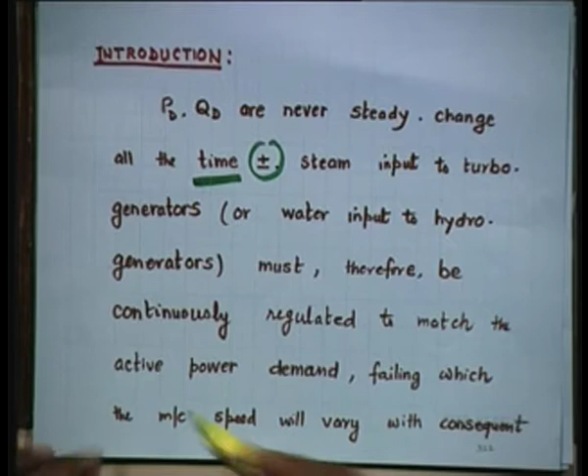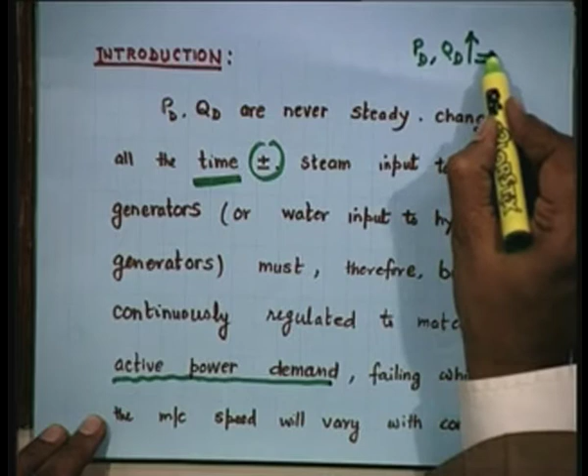Steam input to turbo generators or water input to hydro generators must therefore be continuously regulated to match the active power demand. Since PD and QD keep on varying, correspondingly your steam input or water input should also keep on varying, up and down.

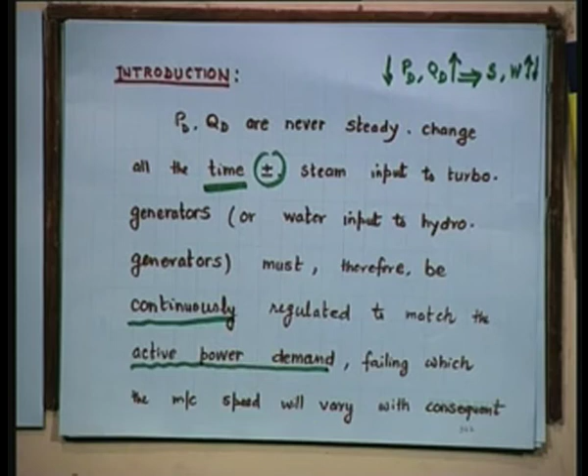So there is a constant matching going on between them to keep track of each other, continuously, constantly. Failing which, suppose you do not do it, suppose you say I do not care, then what will happen? Then the machine speed will vary.

Once the frequency varies, the speed will vary. Once the speed varies, the performance will vary, because motors are supposed to operate in many applications at constant speed. For example, take a flour mill. If that motor speed changes, the atta will have a different variety within just 5 minutes, if the speed keeps on changing.

Or even take a paper machine, a paper factory, the Times of India, each page will be of different width. How do you like it? Each page of each book, if it is of different width, different length, different thickness, the book will look awful. So speed has to be constant, but if frequency is varying, naturally speed is linked with frequency, since F equals Pn by 120. So with P, the number of poles, being constant, and 120 being constant, there is a direct relationship between frequency and speed. If there is a delta F, a corresponding delta N is bound to be there, whether we like it or not.

A change in frequency may be highly undesirable. Think of the clocks, the electric clocks. If frequency changes, the time will also change, and that will play havoc. How can you just keep on changing the time with speed? So it has to be absolutely constant frequency operation; that is all a synchronous machine is about. It operates at constant speed because frequency remains constant.

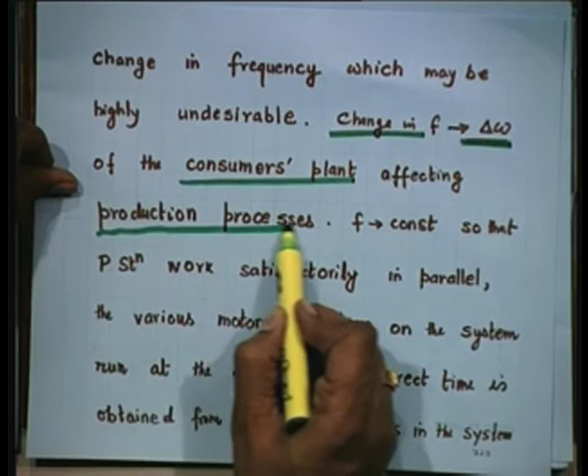If there is a change in frequency, there is a change in speed, again and again I am repeating, of the consumer's plant, affecting production processes. I have already explained how different changes will affect different products, be it paper, be it clocks, be it atta in a flour mill, anything.

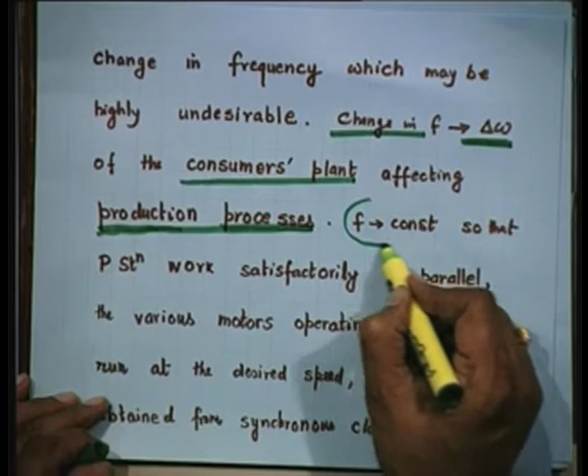So keeping frequency constant is more important than keeping voltage constant, because for voltage we have a voltage stabilizer, a UPS, but a frequency stabilizer is very rarely used. We do have frequency stabilizers, so that the power stations work satisfactorily in parallel, and the various motors operating on the system run at the desired speed, the rated speed for which they are designed. So, designed speed, rated speed, desired speed, required speed, whichever word you want to use, the idea is there is a fixed speed at which a particular motor or device is supposed to work.

Correct time, as I was telling you a few minutes back, is obtained from synchronous clocks in the system. Otherwise there will be no correct time available, and not only that, there will be an error, and this error will be cumulative. As someone says, even a clock which is stopped shows the correct time at least twice a day, twice in 24 hours, but a clock which is running behind never shows the correct time. So even the stopped clock is better than the one not showing the correct time, because that clock will at least show the correct time twice.

You can see even in your hostel, when you get power from a standby generator, it is of different quality. Then you get power from BSES or DESU or DVB, whatever the name is.

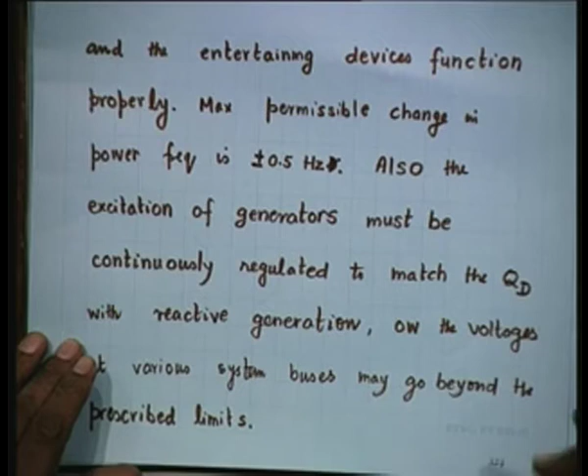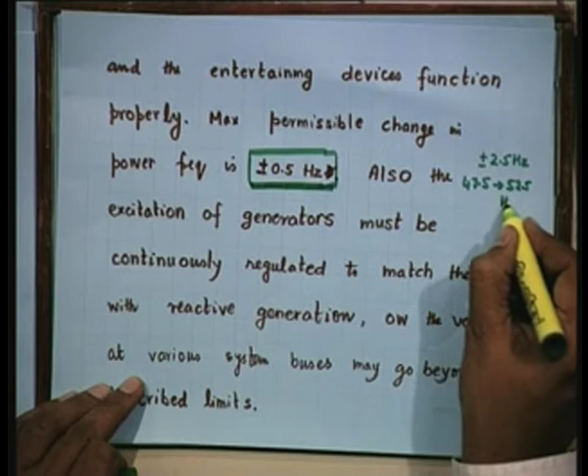The maximum permissible change, I have already talked about it in the beginning of the class, is plus minus 0.5 hertz. But in India, we have a special requirement, plus minus 2.5 hertz. That means it can go from 47.5 to 52.5 hertz.

But in the world standard, it is plus minus 0.5 hertz. If it is crossing beyond 49.5 or 50.5, or in the United States 59.5 and 60.5, immediately AGC will come into play. AGC is automatic generation control.

Unfortunately, we do not have any AGC in this country so far. Also, the excitation of generators must be continuously regulated to match QD. We have been talking about PD so far, real demand, but the reactive demand...

...the reactive generation we have to change. That means we have to change excitation of generators. We want to keep QD constant. Otherwise, the voltages at various system buses may go beyond the prescribed limits.

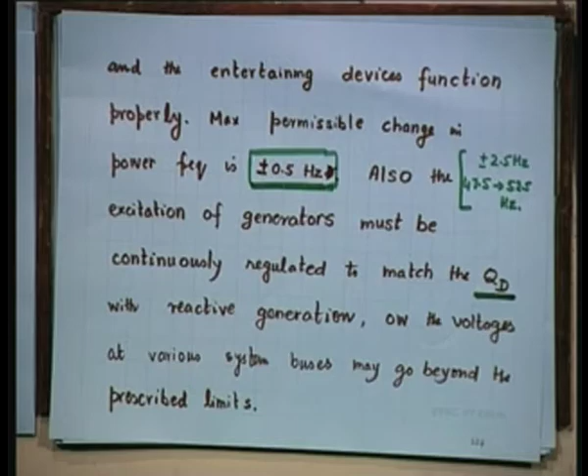This problem we have studied very well in the past, in earlier lectures. If you do not do that, the voltage will go beyond limit, either lower limit or upper limit.

Now, here is a schematic diagram of load frequency and excitation voltage regulators of a turbo generator.

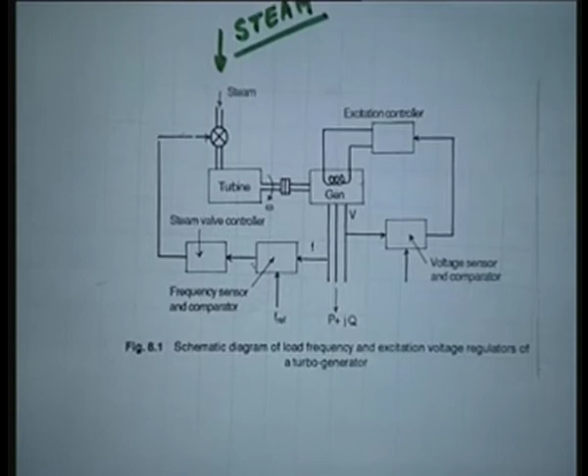From here the steam is coming. How is steam produced? By burning coal, water getting heated up in the boiler, then steam is passing through the turbine.

The fuel can be coal, natural gas, nuclear fuel - it can be uranium, thorium, plutonium, anything, it can be multi-fuel. As I told you, now cars and buses run on multi-fuel. Similarly, here also there can be multiple fuels.

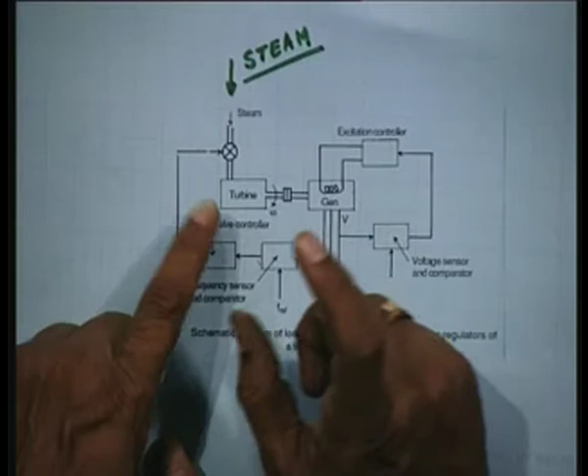Once the steam at proper temperature and proper pressure enters the turbine, which is running at some speed and connected to the generator, power is generated. You take a sample from this power, P plus jQ, which is fed to the grid.

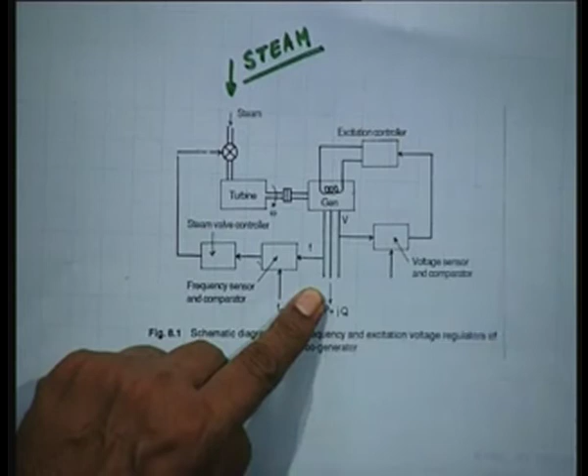All those transformers, circuit breakers, all things are there. It is not shown in the figure, but that you know.

Sample this frequency, compare it with the reference frequency. You must have done control systems in your earlier lectures, so you have to compare whatever frequency comes.

Let us say it is 48 hertz, and the reference frequency is 50 hertz. So there is a frequency sensor and comparator in this block.

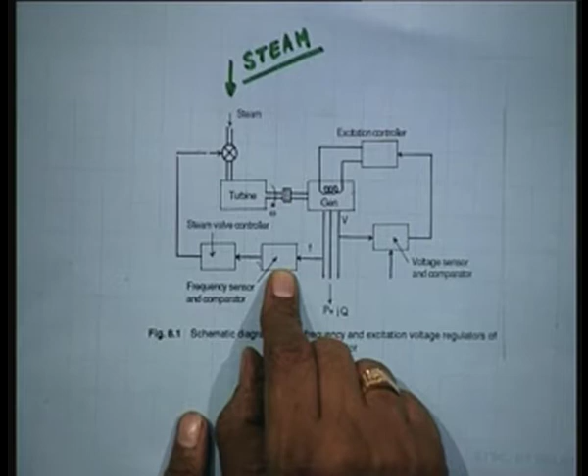It will then control the steam valve controller, because if frequency is low, you have to increase the steam input. If frequency is high, you have to decrease the steam input, and likewise with hydro, you have to open or close the gate accordingly depending on the frequency.

If frequency is below 50 hertz, gate opening will go up, unless it is already full, then you can't do anything. But if there is scope for control, we will put it up. If frequency is higher, which also happens, we have to put the water down.

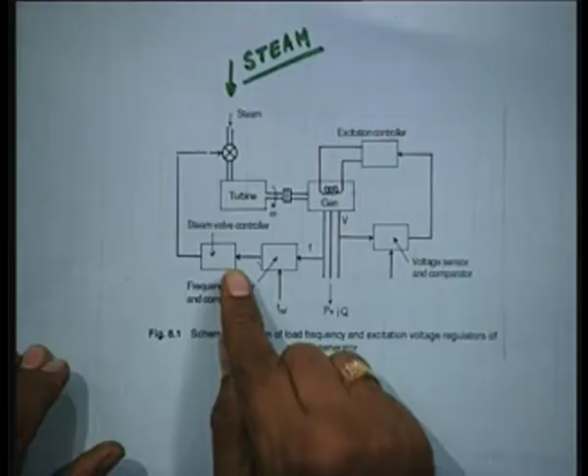This is a steam valve controller, and then the signal goes here. This is called a comparator in control system language.

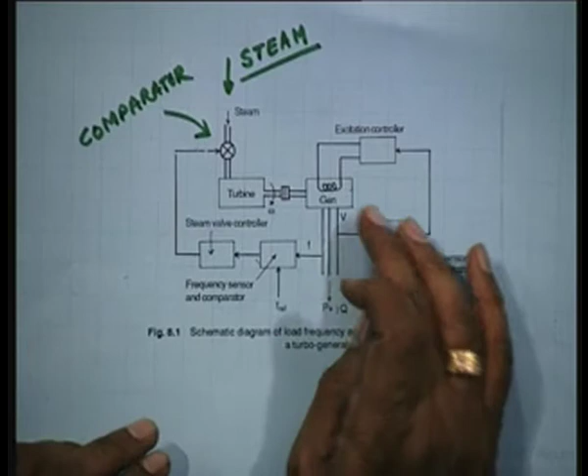And then we control the steam through a controller, and the turbine will operate in such a way that you generate power of correct frequency. Till that time, this feedback goes on.

Simultaneously, there is a voltage control loop - you can't separate them. P and Q, this is choli-daman ka saath, you know, they are always together. You may analyze them separately, control them separately, use them separately, but they are together whether you like it or not.

Similarly, you take a voltage sample, and there is a voltage sensor and comparator. This is again compared with a V reference.

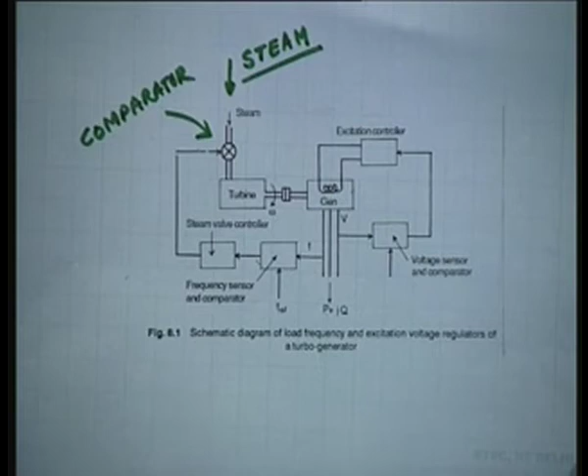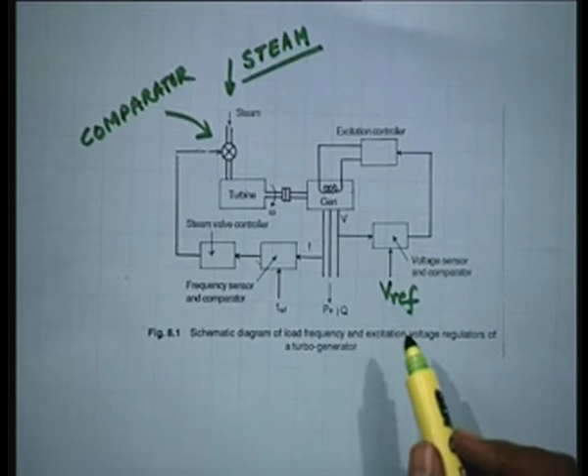This is the F reference, this is the V reference, and if there is a mismatch more than a certain epsilon - what is epsilon here? Plus minus 5%. What was epsilon there? Plus minus 0.5 hertz. So this is epsilon frequency, this is epsilon voltage.

The allowable permissible variation. Then again a signal goes to the excitation controller, then to the field winding, the excitation is controlled, and you get a proper hold. Till this happens, we do that.

Why these two loops? One is a voltage control loop, another is a frequency control loop - they don't interfere with each other. Why? Because their time constants are entirely different. This is a faster control, this is a slower control. So they don't interfere with each other.

I hope this is now fully clear. You can always see more explanation in the book, any book whichever you want. The Elgerd book also gives AGC very well, our book also gives AGC, and there are so many other books.

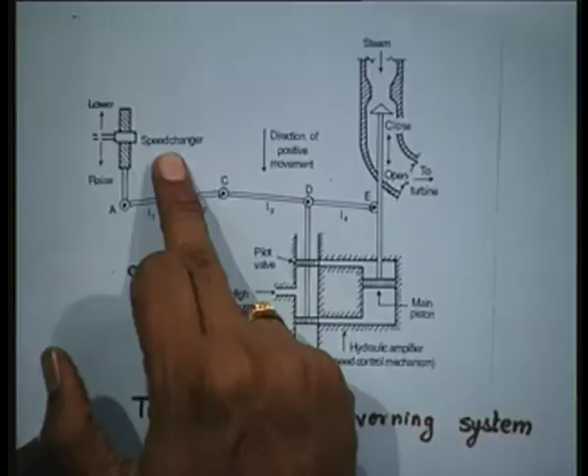Now, this is a turbine speed governing system. It is a very important system, a control in power system. This is a speed changer.

If you lower it, you want to lower the speed, it goes up. If you want to raise, it comes down. This governor you must be knowing for ages, fly ball. And if it collapses, the piston moves in one direction. If it expands, the piston moves in another direction. And what will happen? The amount of steam input will get controlled. That is all you wanted.

Now, the direction of positive movement is downwards. L1, L2, L3, L4, these are the lengths of the mechanism, the linkages. This is a rigid link pivoted at B. This is another rigid link pivoted at D. You just consider here, the pilot valve.

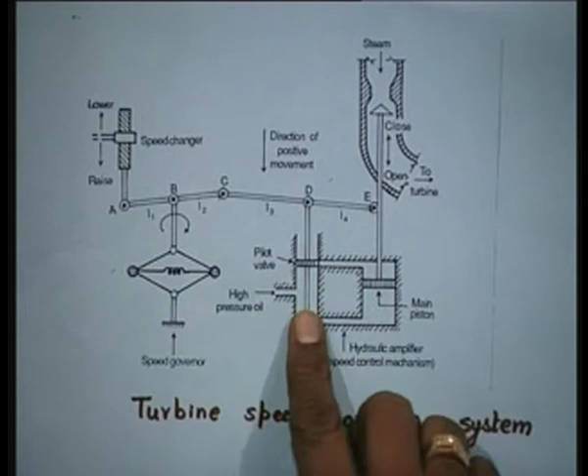This is the input for the high pressure oil. Now if D goes down, this comes down and this gets open, and the oil will enter like this and pushes this main piston upwards. That means you are closing this steam valve. So steam input will be restricted, minimized, decreased, lowered.

Opposite happens if this D goes up, then this entry is not available. The oil will enter from here and will push the piston down. That means you will open the steam valve. That is all.

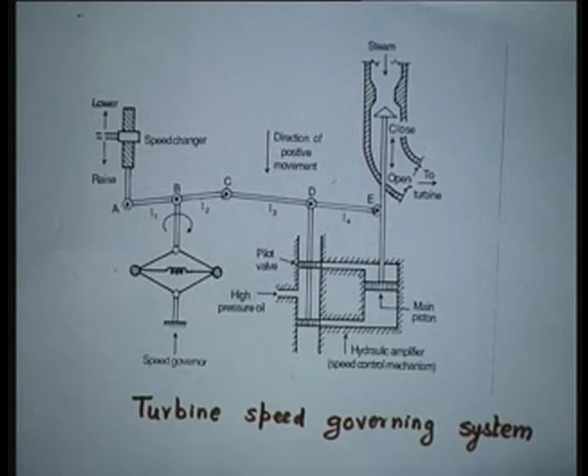For that, this complicated hydraulic amplifier is here, the speed control mechanism. This is the main piston, this is the pilot valve, this is the high pressure oil which operates this whole governing system.

So if you are asked to draw the turbine speed governing system and explain its function, this is what you have to explain depending on the number of marks. If it is 2 marks, 4 lines. If it is 5 marks, 10 lines. If it is 10 marks, then 20 lines as given in the book.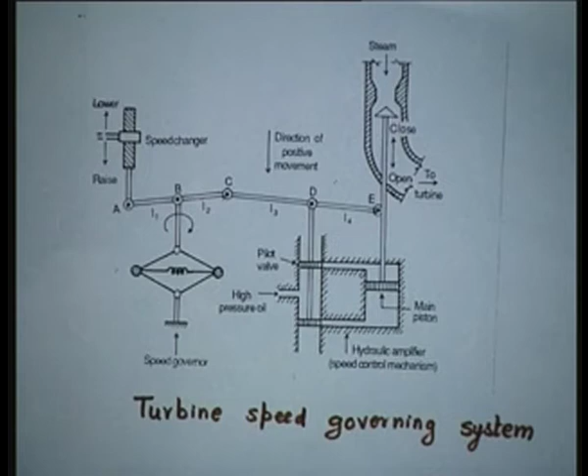In modern large interconnected systems, as I told you, in spite of distributed and dispersed power systems, the fact remains the integrated power system is going to continue. They are not going to throw away thousands of kilometers of transmission lines they have built in the country with a lot of effort. They are not going to throw any conventional power stations just because you have solar, wind, hydrogen, tidal, geothermal, MHD.

So we will continue to have, whether we like it or not, this modern large interconnected system in operation for the foreseeable future, that is 2050. Manual regulation is not feasible in such a big system. How can you regulate manually?

And therefore automatic generation and voltage regulation equipment is installed on each generator. And let me tell you, generators are not many, they are only 10% of the total number of buses. Figure 1, which you have already seen, gives the schematic diagram of load frequency and excitation voltage regulators of a turbo generator.

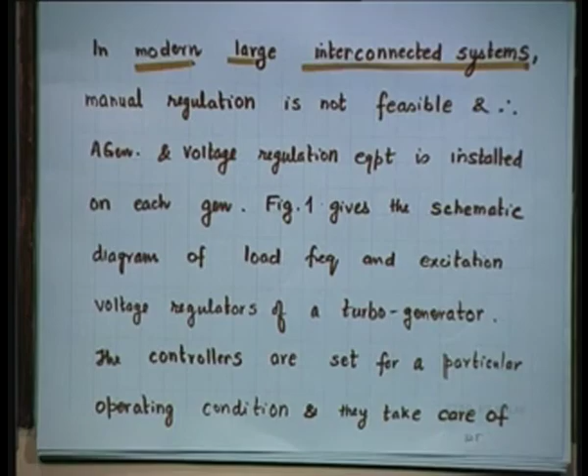The controllers are set for a particular operating condition. Initially you have to set. When you start from your home, you set a car to a particular speed. Then you manipulate it, control it, depending on if some vehicle comes in front of you or the road is clear.

You are driving at midnight to go to Indira Gandhi Airport, then you can go faster - 20 minutes you will be there. But if it is morning 9 a.m. or evening 5 p.m. rush hour, you have to go in slow mode.

For a particular operating condition, regulators take care of small changes in load demand without frequency and voltage exceeding the prescribed limits. But with the passage of time, as the change in load demand becomes large...

If its fever is around 99, nobody goes to the doctor. You may take some paracetamol, crocin, or in olden days just tea with tulsi leaves, it will set you right. But if it is 102, 103, because of dengue fever or such fever, you go and immediately get all your blood tests done.

So, if load demand changes are large, then controllers must be reset. How do you reset? Either manually or automatically, depending on what mechanism you have in your system.

So, the controllers must be reset either manually or automatically. These are the only two ways.

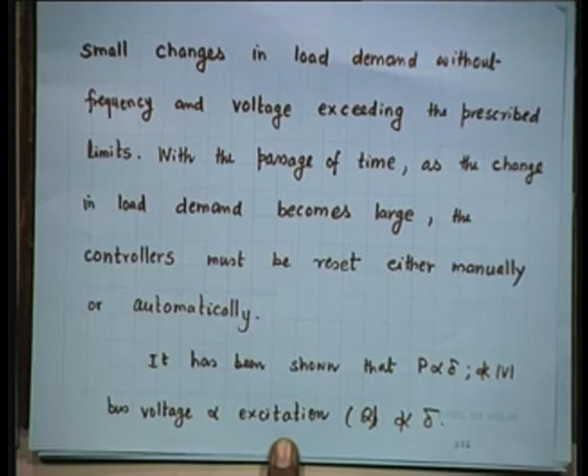It has been shown at least 100 times that real power depends on delta and does not depend on voltage appreciably, to be exact. After a lot of approximations you can remove delta also from the delta Q equation, and you cannot remove V anyway from the P equation, that is EV by X into sin delta, but those E and V's are constant supposedly. Voltage is proportional to excitation, and Q is not proportional to delta.

If you recall, delta Q is equal to VR upon X into delta V, where delta V is Vs minus VR.

Delta delta is caused by momentary change in generator speed. Therefore, load frequency and excitation voltage controls are non-interactive, because they are not dependent on each other. When the voltage loop is operating, the angle or speed loop may not operate. They are non-interactive - this word is very important. For small changes they can be modeled and analyzed independently.

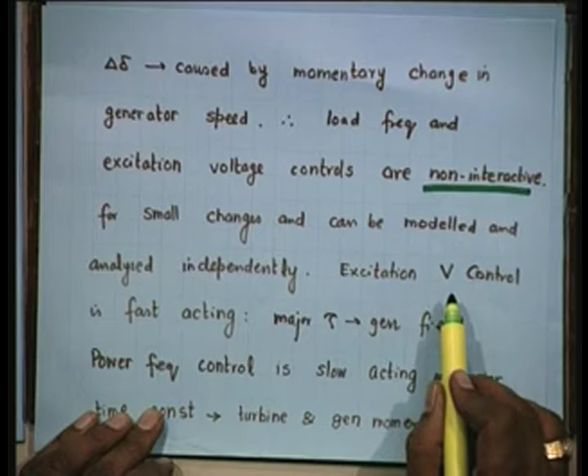That is the approximation. Excitation voltage control is fast acting, as I told you earlier, that loop is fast acting - the time constant is small. Whereas in the frequency loop the time constant is large, so it takes a longer time.

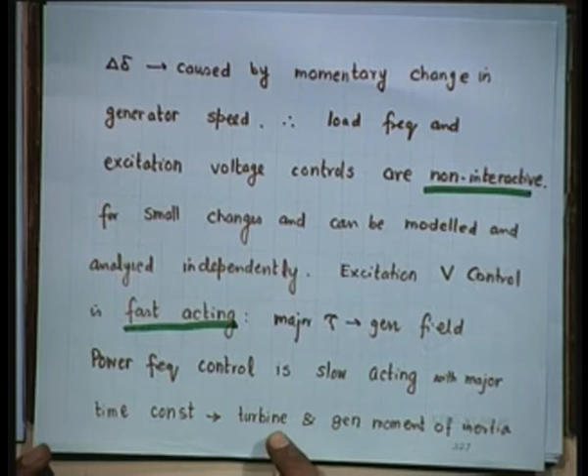What is the time constant? Reaching 63.2% or something like that. It takes more time. Major time constant is the generator field, which is larger, and hence power frequency control is slow acting, with major time constant being the turbine and generator model moment of inertia.

The book gives all various ideas of different time constants that you can read.

Thus the transients in excitation voltage control vanish much faster because it is quick acting, and do not affect the dynamics. This is a very good thing that God has done, that these two loops are non-interactive.

Otherwise there would have been further complications - you try to correct frequency and voltage gets corrected, you try to correct it when it is not required, you try to get voltage control and frequency gets corrected. Corrected means disturbed. But luckily they live together, peacefully, with no interaction.

Like nowadays in hostels our students live 3, 2, or whatever number without any interaction. Undesired interaction - the desirable interaction should be there.

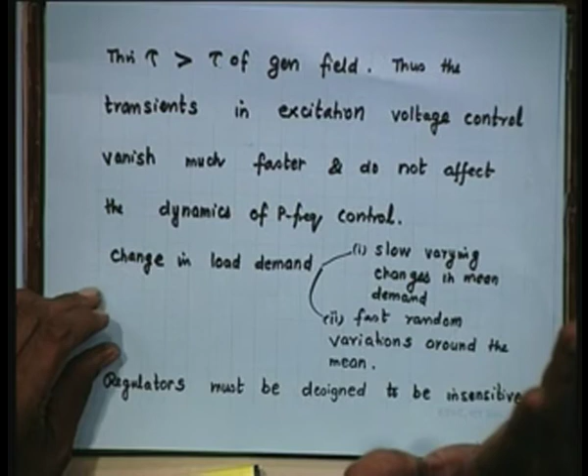So these voltage control transients vanish much faster and do not affect the dynamics of the PF control. So change in load demand involves slow varying changes in mean demand, and fast random variations around the mean.

These two things are entirely different. The mean may vary very slowly, but variations around the mean can be fast. Regulators must be designed to be insensitive to fast random changes.

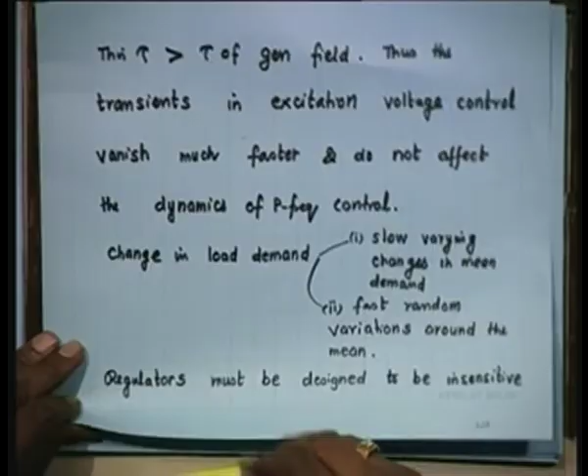Should not act just because it is 99 or 98.6, you should not go and take paracetamol. Allow it some time so that it may go off on its own.

Like power swings in protection, you must have read - don't just get your relays operated unnecessarily, it may be just a passing swing, it will go. All pain here is not a heart attack, you should not rush to bypass surgery - it may be just gastric pain or just like that.

So regulators must be designed to be insensitive to fast random changes, because we don't intend to take note of them. They will come and go. Otherwise the system will be prone to hunting.

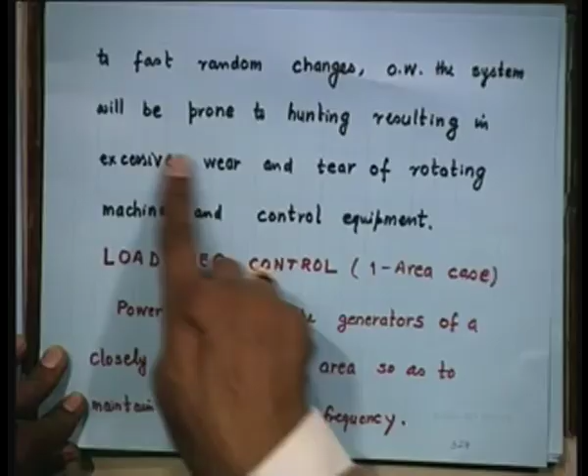Hunting is a very important topic in synchronous machines, and to avoid that we have a damper winding and second order equations we have written, and we can analyze hunting, resulting in excessive wear and tear of rotating machines and control equipment.

Like using brake should be used very sparingly. It gives you a jerk. The fellow who is sitting at the back, if he is not careful, he may hit the top if the car is small, or he may have a back pain.

Load frequency control, now we will study in detail for a single area case. What is single area? Single area means Delhi, state of Delhi. We don't consider Haryana, we don't consider Punjab, we don't consider UP, we don't consider Uttaranchal, neighboring states. So only Delhi, just your house, just your room, not the whole hostel.

So power output of the generators of a closely knit electric area so as to maintain the scheduled frequency. At least you have to keep your room clean, then only you can talk of hostel being clean. So if you maintain your frequency in your area, naturally it will help the larger system also, because this is called component to subsystem to system approach.

This in system theory is another branch of electrical engineering, in fact all engineering, because there is a system everywhere except India. In India there is no system. So component to subsystem to system approach. So you have to take care of components, then subsystem, then system. As it is known, if you take care of the penny, the pound will take care of itself. If you are not spending any penny, where is the question of spending a pound?

All the generators in such an area constitute a coherent group. What is the meaning of coherence? Coherency is a very important topic in electrical engineering.

Its larger meaning is not just same frequency. For example, two of you move together. You go and take tea together, you go and take breakfast together, you go and take lunch together, you live together, you want to die together, that type of thing. And that is called coherency, coherent group.

Do sharir ek pran, something like that. Always moving together. Similarly, these all generators swing together. If you plot their swing curves, I am sure all of you know what is swing curves. Delta versus time.

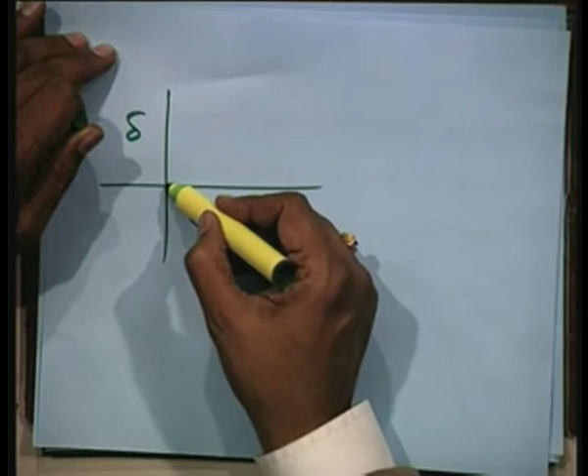So another will have similar. So we can say they are swinging together. So if you study the stability of one, automatically where is the Ram, is where the Sham is. So if you know about Sham, Ram is normally found there only. That is a coherent group.

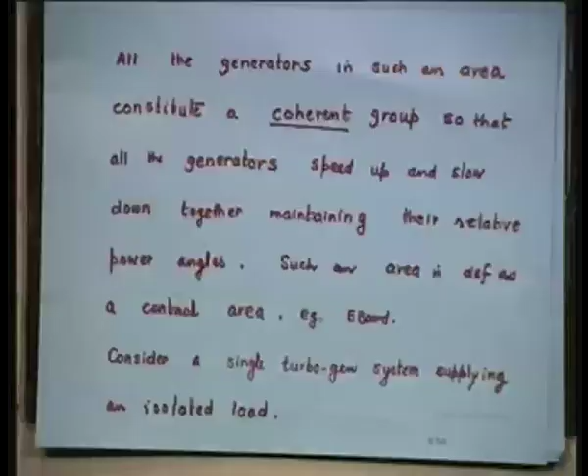So all the generators in such an area constitute a coherent group. Delhi, Indraprastha powerhouse, Badarpur powerhouse. Naturally, whatever happens to Badarpur will happen to Indraprastha because they are all interconnected, and a small well-knit coherent group is called DESU or DVB or BSES system or Tata Power, whatever is the name. So all the generators speed up and slow down together. They swim or sink together, maintaining their relative power angles.

So delta 1 2 will be 0, delta 1 minus delta 2, because the values are same. Such an area is defined as a coherent area. So if you are asked in the exam, define a coherent area. For example, given electricity board, E board is not like e-governance or something, electronic board, it is electricity board here. For a change, E stands for electricity.

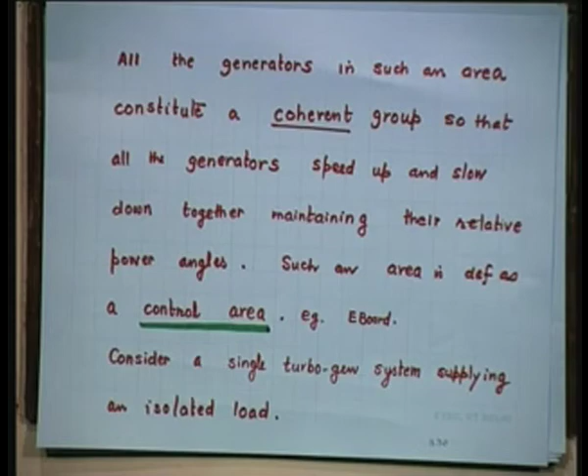Consider a single turbo generator system supplying an isolated load. With distributed system and dispersed system coming back, they are not replacing the interconnected system, I told you some time back, but they are very much there now. Why? At every village, every far off place, Kutch, Leh, you cannot take the grid. We are a poor country. Where is the money to build? Even in today's paper, it is saying there is an item that the Agartala to Dhaka bus is a failure because there are no passengers.

So such a link will be a failure where you need only 2 megawatt, and that 2 megawatt is coming from Delhi to Leh. It is better to generate that 2 megawatt in Leh itself, and there is where the importance of distributed power system and dispersed power system comes in, even if the generation cost is a bit higher.

Let us argue with those people who are against non-conventional energy sources. You explain to them, how about the cost of transporting or transmitting or taking power from Delhi, or even nearest, let us say Punjab to Leh, let us say Pathankot or Jammu, wherever your power station is. Going to Leh itself is about 300-400 kilometers just for 2 megawatt, because the requirement is not much, not many people stay there.

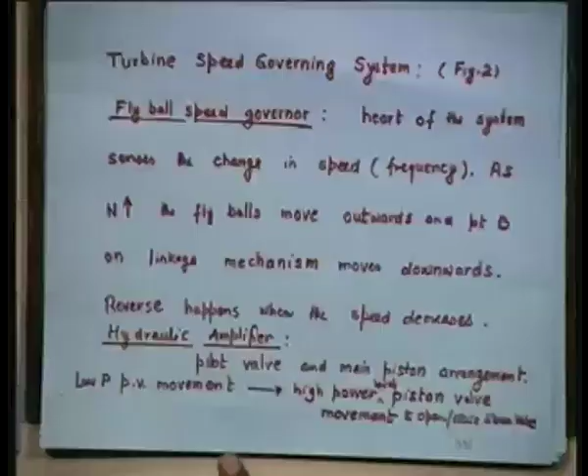Consider a single turbo generator system supplying an isolated load, like Leh or Kutch, which are isolated loads. I have already shown the turbine speed governing system figure. We were talking about this fly ball speed governor, which I have shown you in the picture. It is the heart of the system.

It senses the change in speed. Speed and frequency are the same thing, only differentiated by a constant: P n by 120 is f. As n goes up, the fly balls move outwards.

Point B on the linkage mechanism moves downwards. The reverse happens when the speed decreases, and naturally this will operate the valves, the pilot valve, and the amount of oil will be controlled, which in turn controls the opening of the steam valve. So it will again control the input of steam to the turbine, either increasing or decreasing it depending on whether you want more or less generation power.

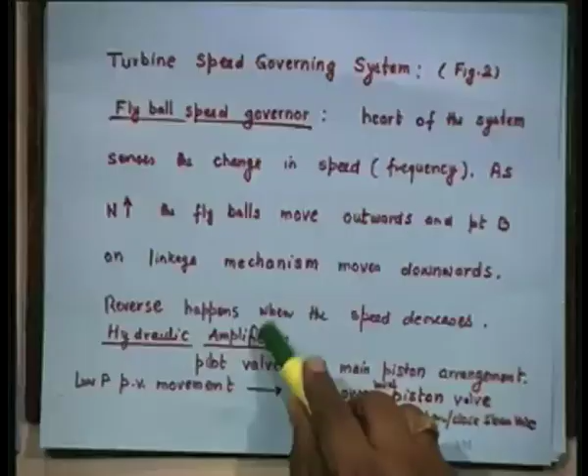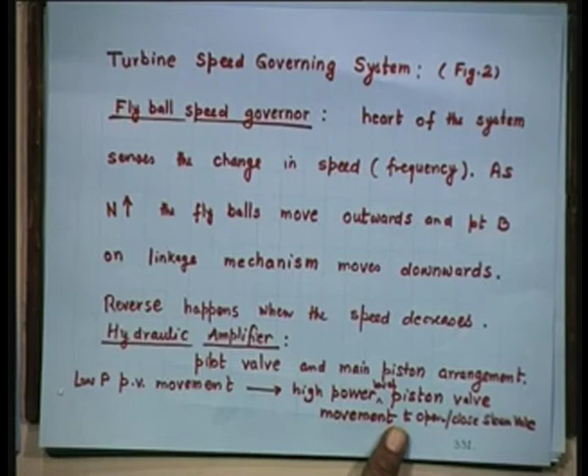Linkage mechanism: ABC, I have already talked about it, and CDE were rigid links. It provides B pivoted at D — a shortcut language I have used since I already explained it with the figure. It provides a movement to the control valve which is proportional to change in speed.

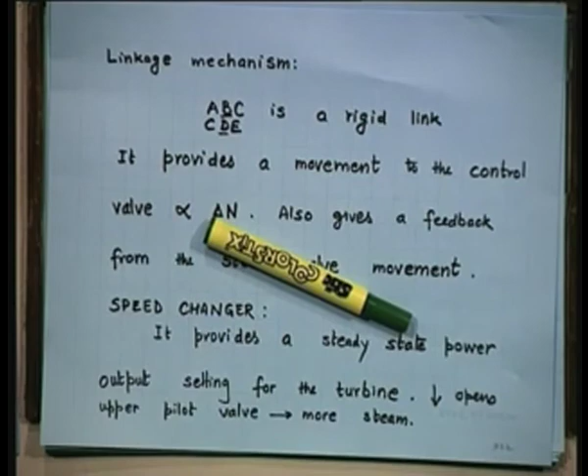Change in speed will trigger this. If there is no change, this fellow will sit quiet, having a coffee break, tea break, nothing — no piston valve movement, no main valve movement. What for? You are getting constant speed operating, constant power being generated, frequency is a beautiful 50 hertz, the voltage is excellent 220 volts or 11 kV, whatever, and nothing, no AGC will operate, no voltage control mechanism will operate. What for? If you are fine, blood pressure 80/120, temperature 98.4 degrees Fahrenheit, pulse 80, why should you go to the sick bay? You should not stop there, straight away come to the institute.

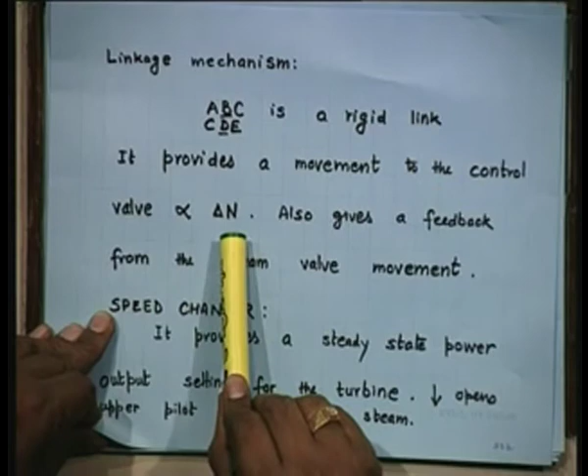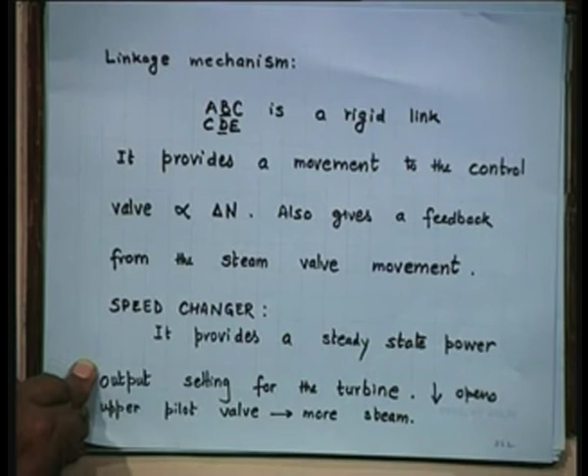It provides a movement to the control valve proportional to change in speed, and also gives feedback from the steam valve movement. The speed changer provides a steady state power output setting for the turbine. If the speed changer goes down, it opens the upper pilot valve and more steam will come. This I already explained.

Speed changer — more steady power output will be obtained once the steam valve opens. The reverse will happen for upward movement of the speed changer: the steam valve will get closed, less steam will go, and less steady power output will be there, because the requirement has changed.

It is not required, so why should we generate more power? It is not only that this will operate when frequency changes — even if your power requirement goes down, naturally you have to bring down the steam input. So do not think this mechanism will only operate if there is a change in frequency or speed. Even if the power requirement changes, you have to generate less power. Why should you generate more power?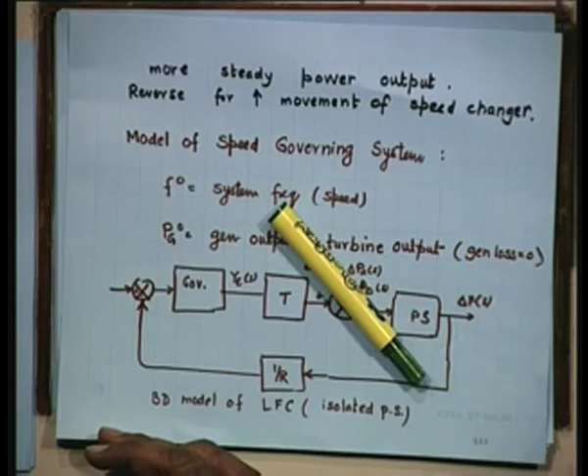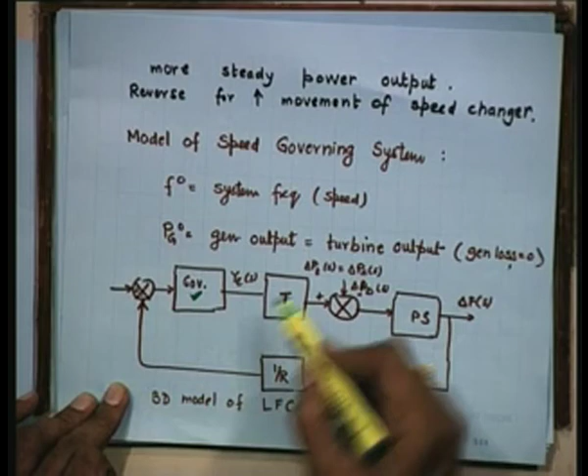Model of the speed governing system: you must have solved this block diagram and drawn it several times in your control system course. F0 is the system frequency, PG0 is the generator output, which is here, and the turbine output — let us assume they are equal, assuming losses are not there. This is the governor block diagram, this is the turbine block diagram, and this is the power system block diagram.

All these diagrams are given in detail in the book. Since there is no time — we have only one more lecture — kindly go through this in detail in the book. Tomorrow we will solve two problems as a tutorial, maybe here itself, though whether they do this or not hardly matters.

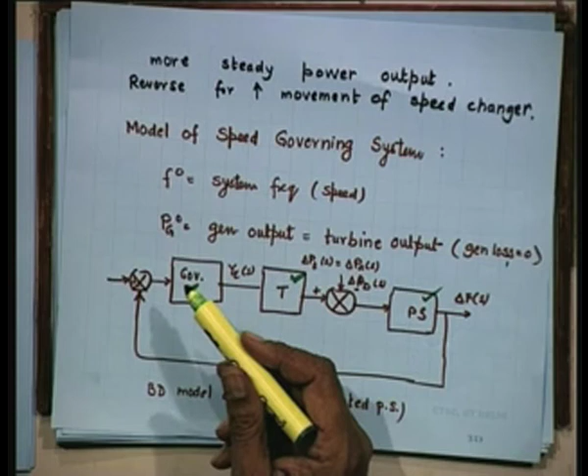This 1 by R is a controller, the regulation constant. This is a BD, meaning block diagram model of LFC — load frequency control — for an isolated power system, just one power system. This is the change in frequency, and this is the feedback, so this gives a correction. It compares with the scheduled frequency. If there is a change between them, there is an error, then it goes to the governor. If there is nothing, fine, no control is required.

Let us do steady state analysis. Two important incremental inputs to the LFC problem are change in speed changer setting and change in load. These are the only two inputs.

Consider that the speed changer is fixed, so we get rid of one input. The only input is load change, and such an operation is called free governor operation. This is asked in many interviews - what is a free governor operation? In all IES exams, engineering services exams, NTPC, Power Grid, or anywhere, it only means fixed setting of speed changer, and that is called free governor operation. Governor is free, it is not controlled.

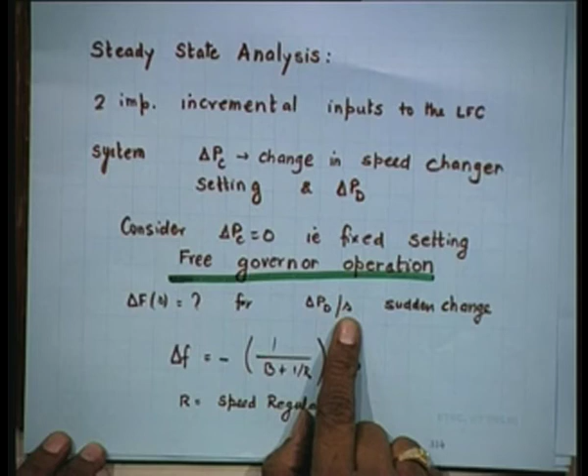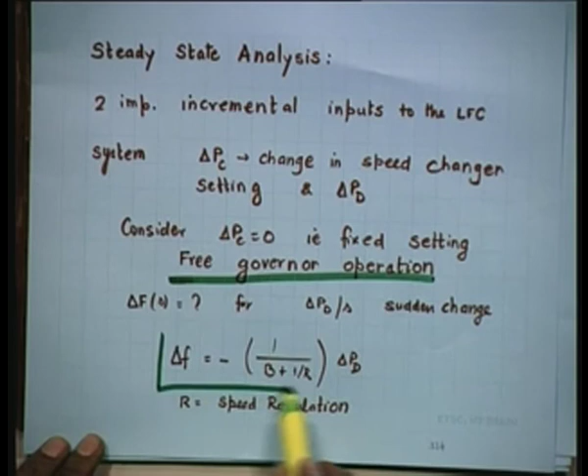So find out the change in frequency for a sudden change in power demand. Sudden change means a step input. Step means 1 by S is the Laplace transform for a sudden change, and this equation is very important. It relates the change required in delta frequency because of change in demand, where R is the speed regulation, and B is a power system constant. B can be ignored, as we will see in the next slide.

R is so adjusted in such a way that delta F is small, of the order of 5% from no load to full load, change in frequency. Therefore, a linear incremental relation can be applied.

Now this figure is very important. Study this figure carefully. Y axis is frequency percentage, starts with 100, 103, 105, stops at 105 because we do not allow more than 5% variation. What is x axis? Percentage load.

60%, 100%. You may require just 60% of the load - it is night time, all loads are switched off. In the month of November, neither heater nor fan is there, no cooler, no AC, not even fridge. So the load drops, you may operate at 60% of the load, yet you need the frequency the same. 60% load does not mean you can reduce your frequency. The frequency still required is 50 hertz. So load can be 100%, the frequency is still required to be within plus minus 5% range.

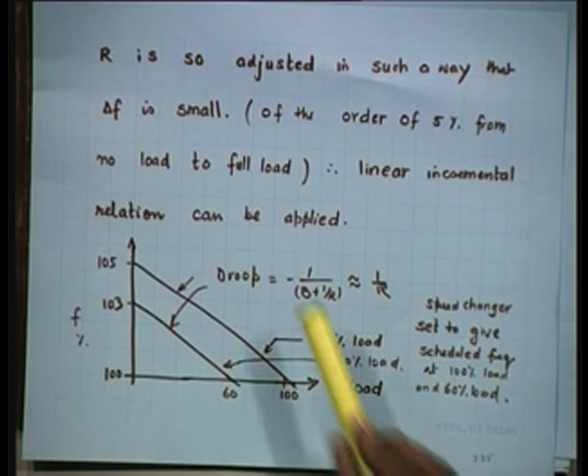And droop - this is a droop characteristic. Why droop? The load goes up, frequency drops. Though it is linear, it is a droop characteristic, and the slope is given by 1 upon R. B is very small, you can ignore it. It will become minus R, because if B goes, 1 by R, R goes up.

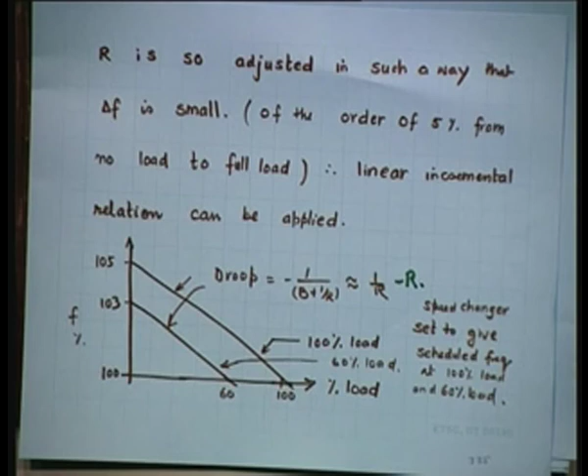Speed changer is set to give scheduled frequency at 100% load and 60% load, and that is why delta F then will become minus R delta PD, and this R is the speed governor regulation.

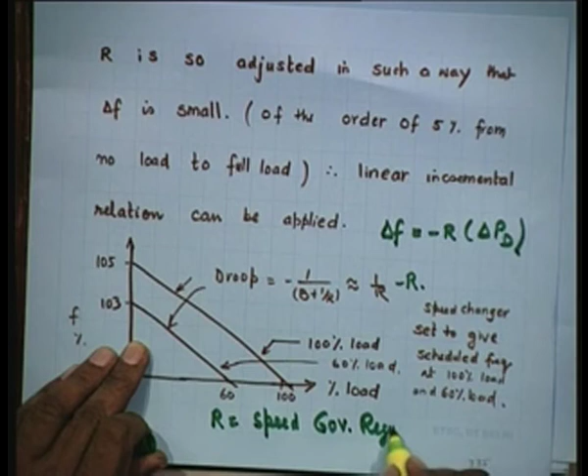So with this we will stop today. Tomorrow we will solve a couple of problems, then we will go further, and the AGC topic goes on.

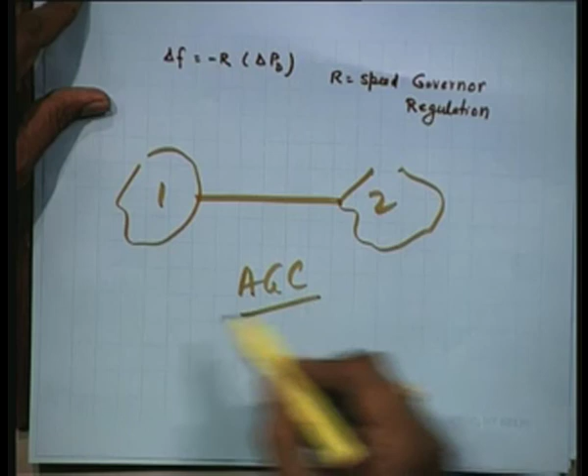It's not just one area - we have just considered one area. Then there can be two areas, then both areas linked with a tie line like this, and there is a tie line, it's interconnected. Now you have to have AGC of this two area control. There can be a third area. This can be thermal, it can be thermal, hydro, nuclear.

It gets complicated, involved - deadband control. You have to consider deadband also. What is deadband, any idea? There is a certain time for which the controller doesn't operate, it takes time. Like a certain effort is required to continue to run the machine at no load - there is no output, but still input is there, because you have to supply losses.

Then there is a generator rate constraint, GRC. It takes time to increase the generation, it is not instantaneous. So the rate of generation increase, which is 20% in hydro, I told you in the first chapter. In thermal, it takes more time, it is slow.